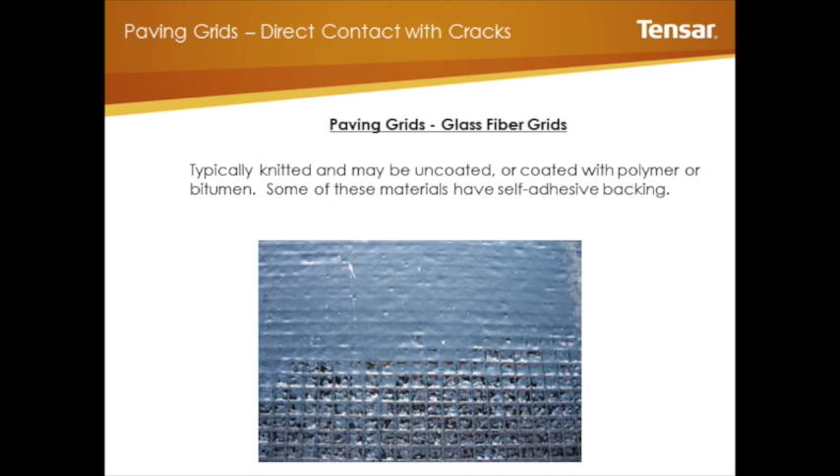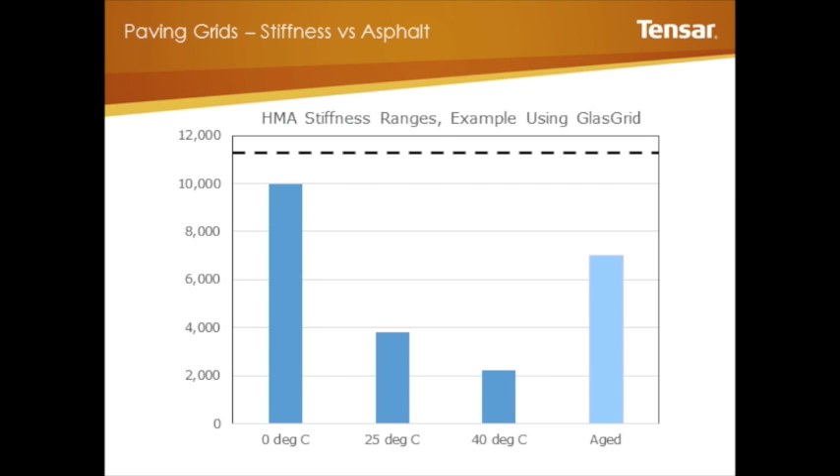And another case in point is when you're looking at testing of these materials - is it valuable to evaluate asphalt at room temperature when typically the risks are associated at low temperatures or when the material is brittle?

Now, to move on, we spoke about a product that has great bonding characteristics and integrates itself well, and we've seen we want a material that has a stiffness modulus advantage over the surrounding materials.

Paving fabrics, which we're not covering in this specific presentation, have been around for quite a while. They basically started the interlayer trend, and some of their benefits is that they also offer a moisture barrier. So typically with your paving grid, you do reduce the incidence of moisture movement, but you do not prevent it.

And so there are other products out there. A paving mat is probably the newest interlayer product out there. It's about 10 years old. Probably over 10 million square meters of material have been installed to date, and it's really a fast-growing interlayer. Why is that? Because we have increased the use of RAP in our day-to-day design.

When you include a non-woven paving fabric in your structure, the incidence of fabric in your RAP mix prevents you from reusing it as is. So it typically has to be screened, and it's a very expensive exercise, and most contractors do not wish to do that. So it's important for you to keep in mind that when you are specifying paving fabric, you may have an issue with respect to the RAP not being able to be used in the future. There are some facilities in the United States that can screen the material, but very few - I think I can think of 2 at present. So that is a consideration.

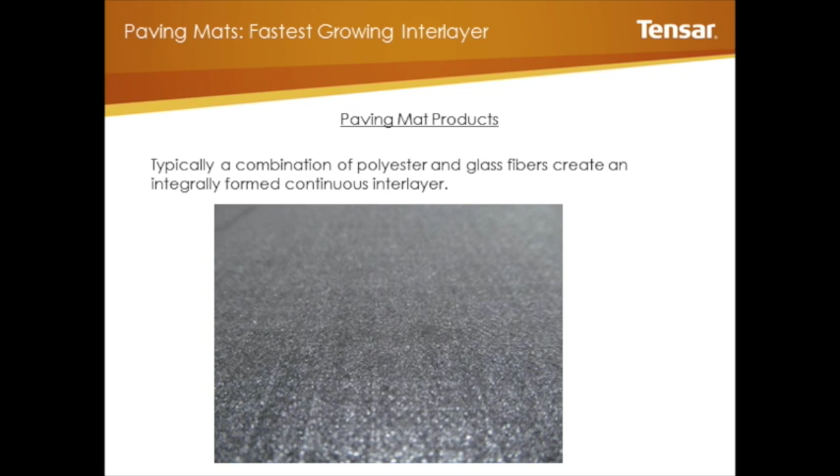So the paving mat really came about in that they were looking for a product that could give you the continuous moisture barrier benefits, but at the same time also perform more like a grid. So they came up with a material that can do both - looks like a fabric and performs like a grid. And it's recyclable. So that was a great transition that has occurred, and you now have a paving mat available for your use.

Another product that is also available is for conditions where you have distress in very localized areas. Remember, a lot of these materials require a tack coat for installation. So you have to come down with your distributor and spray tack on the road surface before you install your product, and that's quite a lengthy exercise. So it lends itself to larger application areas. Where you have just a localized crack, you would like to just come in and, what I like to term it, a Band-Aid - just install some material over an isolated crack here or there.

Then you have this peel and stick product. It basically has its own tack coat attached to it, so you can get the same benefits of your full width application, but you can install it in very localized areas. So it makes it a very cost-effective technique or use of interlayers.

And remember, I think this is a benefit of interlayers, which is quite foreign to most pavement engineers, in that most of our strategies we adopt, apart from patching of course, in most rehabilitation or maintenance projects, we look to cover large areas of the road surface because that's traditional. And doing it on your full sections, you'd prefer to do that.

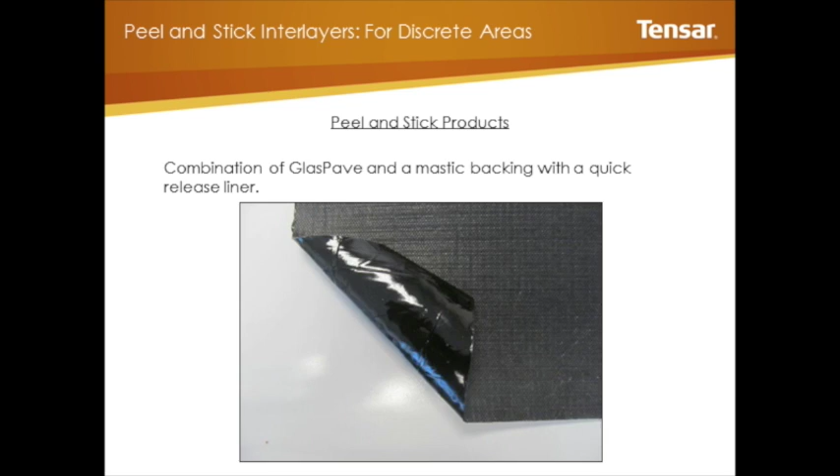The nice thing about an interlayer is you can stop and start the use of these materials without having to make it continuous. And we know that pavements deteriorate in very isolated areas, so you have severe areas and less severe, but you typically apply a standard approach, a standard overlay thickness. You can use an interlayer within that individual design section wherever you wish to without having to change the profile thickness, which generally creates problems. So in this particular case, it lends you that convenience.

A question that's often asked with respect to the use of interlayers on milled surfaces or plain surfaces is, can you put these products on a grind? Now, very simply speaking, yes, you can install anything, anywhere, and probably do it without much risk.

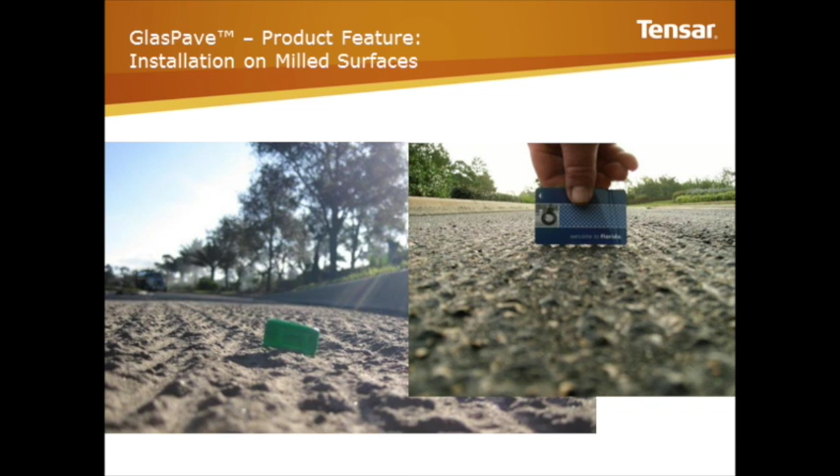But we know grinds of 3 millimeters exist, and some of them go up to 1 inch or 25 millimeters. So you can have this huge variation in grind profile texture. And the important thing is, yes, go ahead and mill to your heart's content and put the products down.

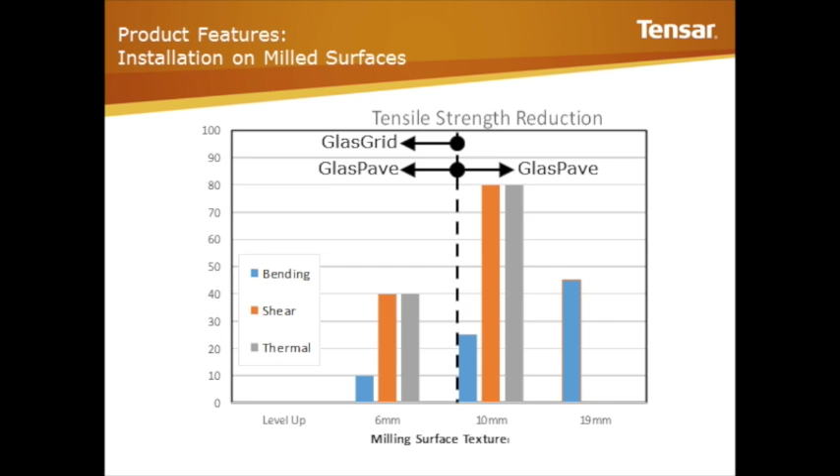But notice when you're going up to 19 millimeters, especially if you've got really severe distress types like thermal or shear cracking, the impact is more severe, so one has to take that into consideration. Yes, you can put it on any mill surface or any textured surface, but remember, you'd have to consider a stronger product than you would normally use if your textures are much greater. So for most of these products, up to 3/8 inch, up to 1/2 inch, you're probably pretty comfortable. Anything greater than that, stay away from your more severe distress types.

Textured surface is a consideration. Another question that's often asked - with all the Tensar products, our minimum thickness in all cases is 1.5 inches. I always recommend speaking with other manufacturers. For example, 2 inches is recommended on top of paving fabrics, and some other manufacturers may recommend that as well. Sometimes there are thickness constraints put on at intersections, for example, where there's a concern about the mix walking or shearing or flowing, however you want to reference it.

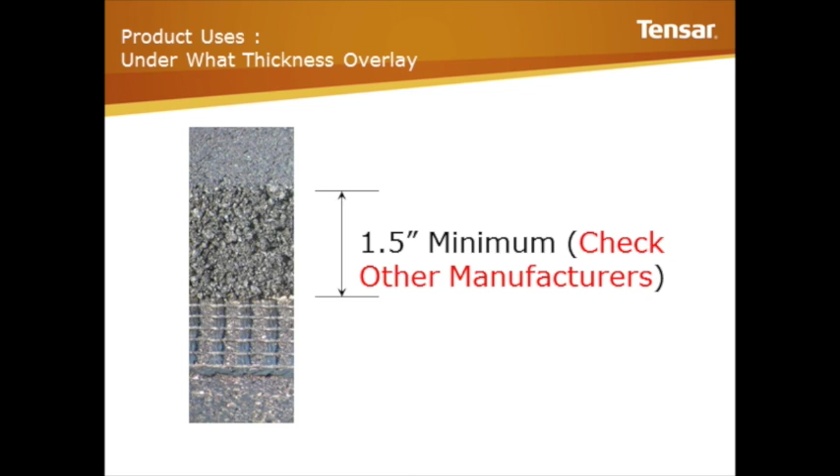My suggestion is before you start playing with thickness, let's look at the project holistically. I wouldn't suggest that just increasing the thickness is going to solve your issue if your mix is walking on top of the interlayer. Other than that, typically you can get away with these minimum thicknesses in all other cases.

Then you'll say to me, but hold on a moment, I heard the other day that you can use an interlayer underneath a chip seal. And I have 3 cases, and hopefully you can see this - I apologize for the quality of the slide. The top one refers to a single seal. Then you have a double seal underneath that, and a cape seal beneath that. I'm not really concerned about the specific aggregate sizes associated with each of these.

A double chip seal comprises 2 different size materials used in conjunction with one another. So it could be a 19 millimeter with a 6 millimeter chip on top. But irrespective, those 2 are more structurally stable. And it goes back to that walking concept - walking is typically the movement of particulate under traffic, so under braking, turning, acceleration. A single chip, unfortunately, the aggregate is more likely to walk because it's not confined, whereas in a double chip you offer that stability.

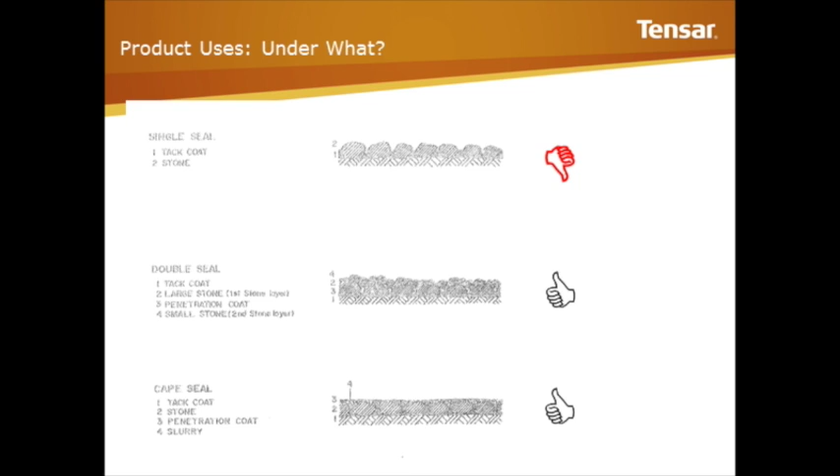And that's why I say you could consider the use of interlayers underneath a double seal or a cape seal. Paving fabrics have traditionally been used for that. We would recommend a paving mat as a good alternative to that. Ultimately it's a pretty good insurance, increasing your binder content as a reservoir for your application, and also to protect your seal from cracks coming through. So thicknesses do vary as it relates specifically to chip seal applications.

Now, where and why - I've got a range of application types here, so you can hopefully see that that's an airplane.

And for the tennis players in you, you can probably relate to that one. You see some ports, parking areas, residential, anywhere where you typically use asphalt as a surfacing is where you could consider addressing reflective cracking. And that's the trigger.

In some cases, there is the use of reinforcement. If used in a specific location in the pavement structure, you can actually get some reinforcing benefits, but that needs to be designed, and you'll see some boundary conditions, and we'll discuss it later on.

I've also got a couple of pictures of some different distress types, and what we recognize is, and I had a discussion this morning, we typically lump all these things under reflective cracking, but the reality is there are multiple crack types, as you'll see shortly.

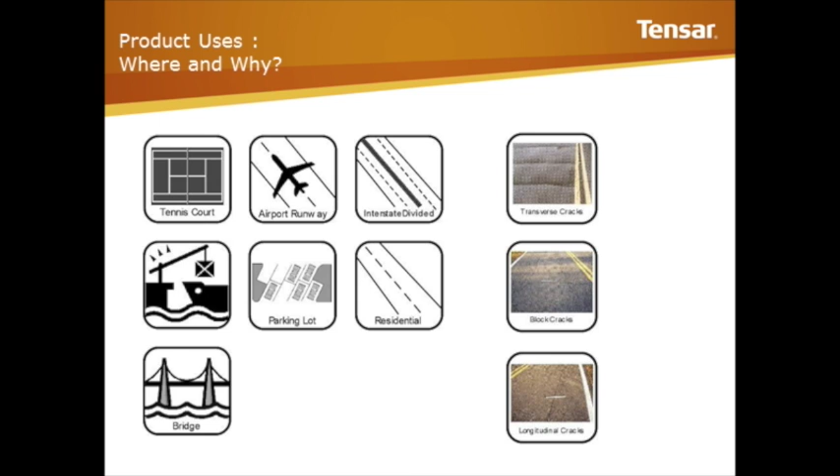But in terms of this, ultimately, whether you use overlays or double chip seals, cape seals, or where you're doing rehabilitation, you have to consider you're trying to protect the flexible pavement from moisture, or where you're trying to address reflective cracking.

This topic is also an important one for you, again, because of the RAP consideration, and important for you to get actual data from the manufacturers, because all of them do state their products are millable, which is totally correct - anything can be milled up. But again, you would like your product to look like this, so that it includes particulate that is not going to compromise the reconstitution of the material when included with new asphalt.

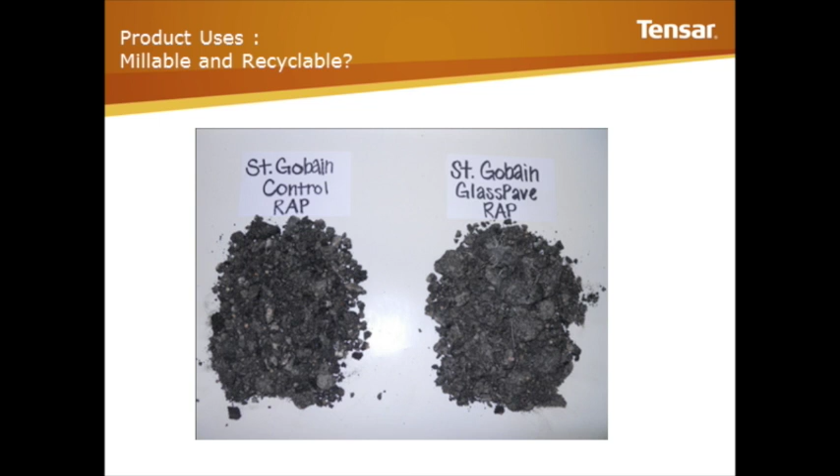So please make sure that you have reports provided to you to support this. For example, this is a study, or an excerpt from a study done at NCAT to confirm that the RAP, including milled particulate from an interlayer, did not compromise the performance.

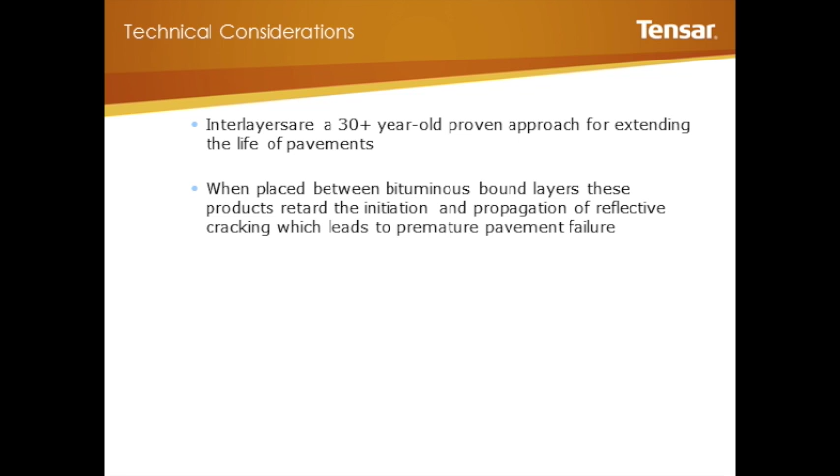They started with polypropylene grids, moved to polyester grids, then to glass. We're still playing with basalt type grids, looking at carbon fiber grids, and we've played with steel grids. We've tried different things to see how they could integrate themselves, and I'd say glass has proven to be probably the most strain compatible with asphalts across that wide range of conditions.

The first type of reflective cracking of interest, relating to the second poll question, is bending. This is typically where you have a crack sitting in a pavement, you stick an overlay on it, and nothing happens until a vehicle drives over it. Then your pavement structure flexes, and that deflection is associated with moving the crack, so strain develops at that point and wants to reflect up through your overlay.

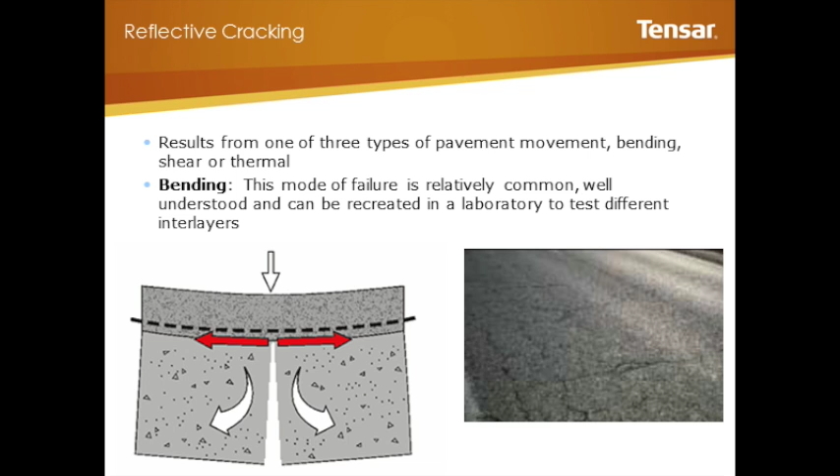This type of crack is a match made in heaven with interlayers. It's an easy one for the interlayer to address, and typically the boundary conditions are not as rigorous as they are for other distress types, so that's a good thing. So how do we evaluate that?

The 4-point beam test is a pretty good indicator of performance in this situation. It's a cyclically loaded test, so you're not just applying continuous pressure, you're loading it as you would in the field with traffic. Typically the test is done unnotched, but in this case, to evaluate reflective cracking, we notch it. Because the performance of these composite systems is so good and could take a couple of days to run, we increase the strain levels.

So you're typically doing strain levels that represent a thin residential street—those sort of load levels under a standard heavily weighted truck axle load. We're putting it under a very aggressive torture test type condition, and we're looking at both crack growth or composite stiffness loss, evaluating to what extent the interlayer can benefit that.

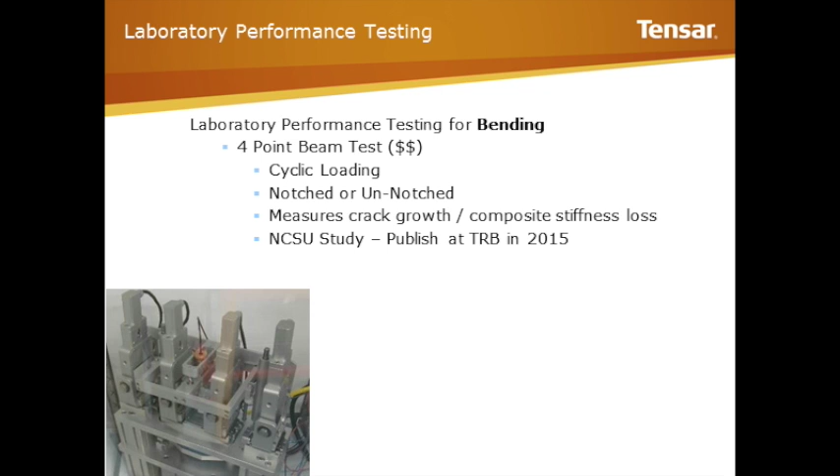When you look at the specimen after the test is completed, you'd be amazed to see there are no cracks. You go there and think, how is it possible we can see fracture during displacement, but not see fracture post the test? There are a couple of reasons: number one, the asphalt is relatively new, and number two, the test is done at room temperature.

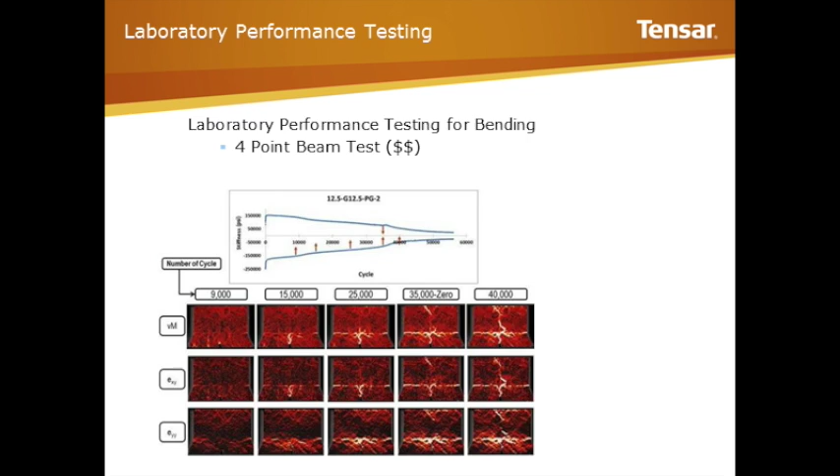And it brings about the question: do you use this non-visual criteria to determine performance, or do you wait for the visual distress to occur before you can actually start predicting how things are going to work? But it was definitely a challenge that we had to face, and was really interesting.

The next type of crack is a shear crack, and this one is best represented by composite pavements. This is where you have your joints moving vertically under traffic loads, where your dowel bars are typically located, and you get a relative movement of the slab. We talk about load transfer if the two slabs are moving down completely in sync with one another - then we talk about 100% load transfer because there's no relative movement. Typically when the pavement structure is new, you would hope that you experience that condition.

With time - I'm based down here in Louisiana at the moment, and they have experience with 20 to 50-year-old slabs - clearly you get loss of serviceability with respect to load transfer, and you can end up with structures sitting at 30 to 50% load transfer, which is typically a failed condition according to AASHTO, where I think everything up to 60% is probably in a relatively poor condition.

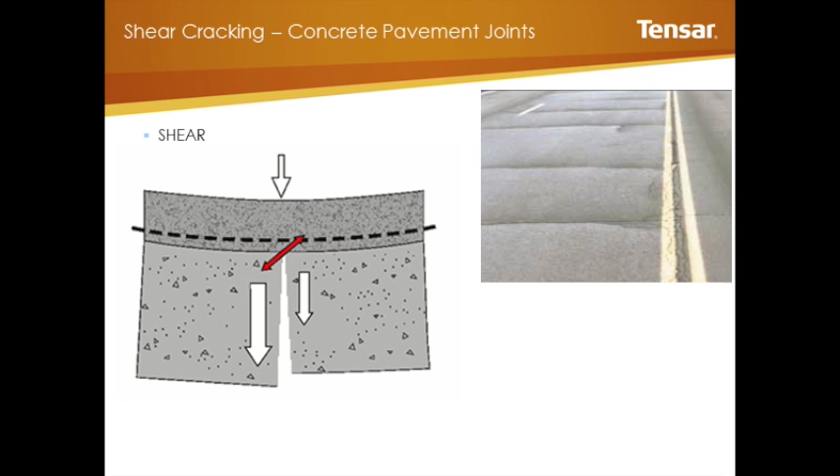What's important here, because this is such a severe distress type, is to understand the boundary conditions associated with it. Because load transfer is such a severe distress type to specify, not a lot of people go out and measure it - firstly because you have to use a falling weight deflectometer to do it, and there isn't a freely available technology to go out and do this.

But let's say you didn't have that information available - then we look at some other indicators. One thing we've learned with experience: I think our first ever project with Glasgrid was on an 80-foot long slab, and it wasn't a real project, we just provided some materials for trials. Clearly the movement at that slab was so significant that if you apply a very little load at one end of the slab, you get a high movement on the other.

So we've learned over time that typically slab lengths of 6 meters or less, under conventional conditions, would be an indicator for us that this is something we can handle - that the need to go and get data is less important, however it doesn't get ruled out.

The next criteria we look at is the number of mid-slab fractures you're experiencing. We typically say that if the number of slabs with mid-slab fractures relative to the total length is less than 30%, then we are still in a reasonable range of level of serviceability. But anything greater than that, we start recommending that some form of measurement takes place before you start spending money or investing in interlayer systems to assist you with this.

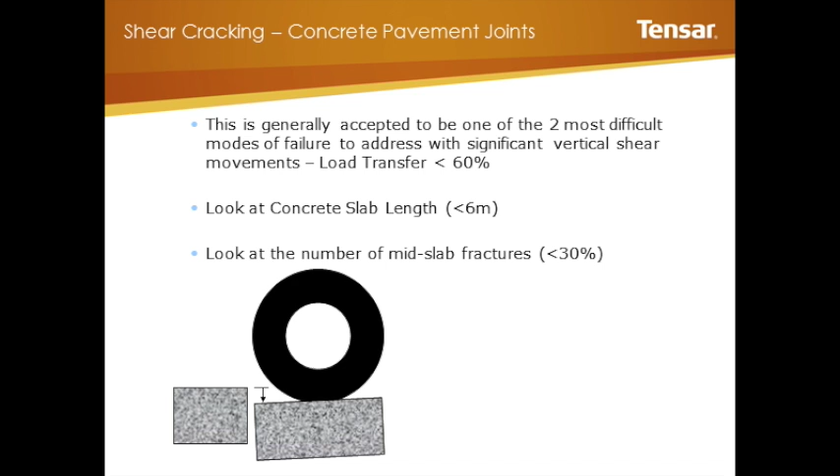This ties in very nicely with the criteria used by AASHTO, but we feel these are good boundary conditions or assessment techniques for you to adopt.

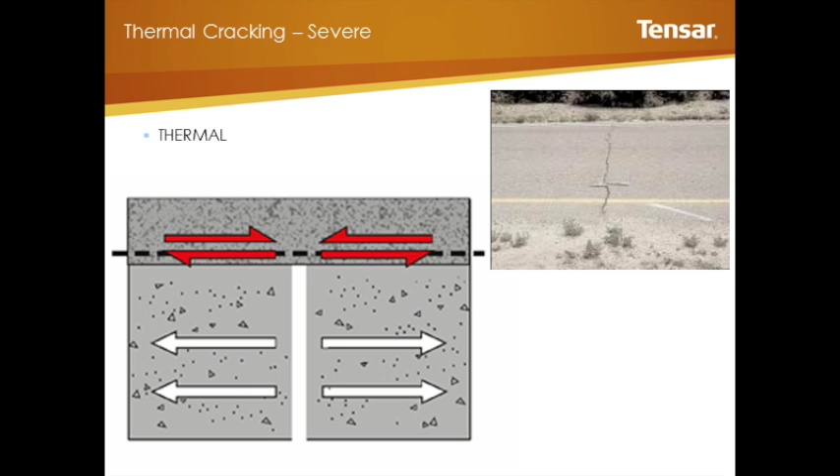The last severe one is thermal cracking. Why is thermal cracking so severe? Because with respect to our product, we put it in parallel to the relative movement that's taking place. So the structure of the product plays a key role in how you can transfer stress onto the reinforcing element. Paving grid, which was mentioned right in the beginning, is better suited to this type of application because your movement has to transfer the stress parallel to the reinforcing product. So an open structure product is very well suited to this type of application.

The levels of serviceability or boundary conditions are just as prevalent here. So we do look at what the climatic condition is where you're doing this, and we recommend that you speak to the manufacturer and confirm the level of suitability in the specific area that you've placed the product.

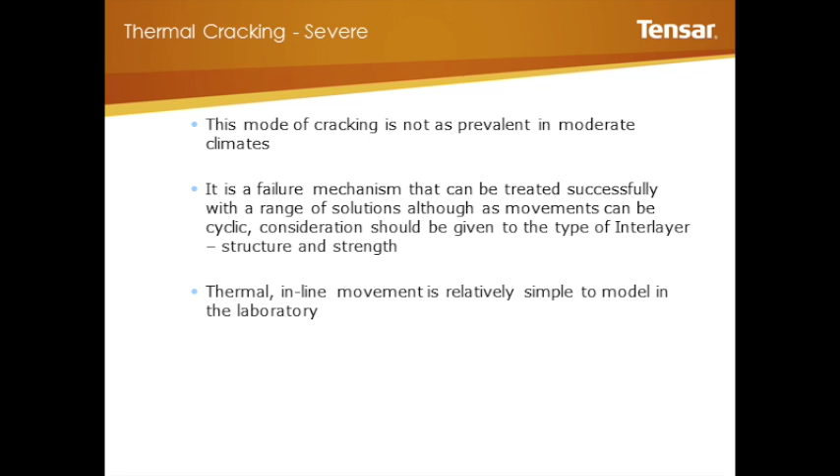We've applied it in very, very aggressive cold regions where the level of movement was way in excess of what our product can handle. So please understand that boundary condition does exist, and we do use empirical tools to help determine that. I'm not going to tell you there's one specific city where you have a problem, because your pavement geometry can also assist in determining how your thermal profile develops in that thermal condition. So there are a couple of things that need to be considered, but we do use empirical tools to assist us in the evaluation.

So with that being said, we've gone through those things. So how do we evaluate these? How do we know they work or don't work?

Fortunately, the Texas Transportation Institute developed a criteria using the TTI overlay tester. They use this to evaluate the mixes post-construction to determine how they perform from a fracture perspective. That's related more to fatigue.

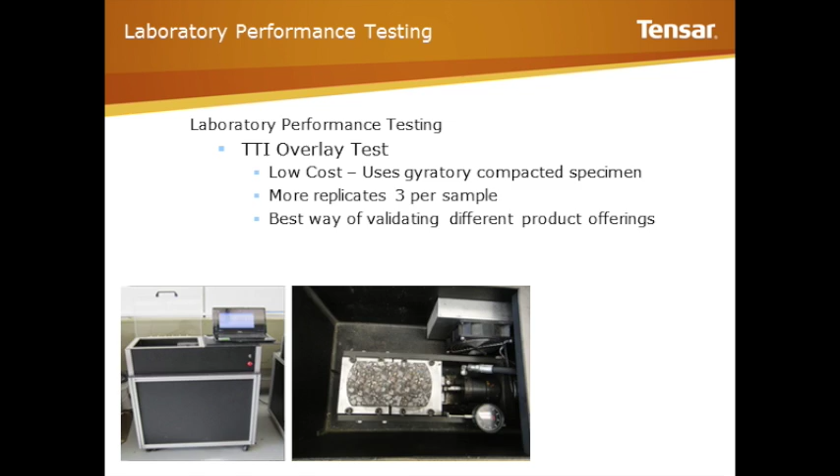So what we decided is we could use this technology, but we've changed the way the material is loaded. We use monotonic testing, and we also reduce the temperature at which the test is performed. Why do we do that? We do that so we can improve the repeatability in the test, because we want to improve its sensitivity. We also believe that at lower temperatures, we get a better understanding of the performance of the mix when it's more likely to fracture.

So what the test does is it applies a load, and if you look at the graph here, eventually it reaches a peak load. The asphalt at that point does not necessarily fracture. If you go back to those other test results I showed you earlier, you may not necessarily see a crack at that point, but it's a point at which you've exceeded the strain capacity of that material. Then it shoots off and you lose significant tensile serviceability.

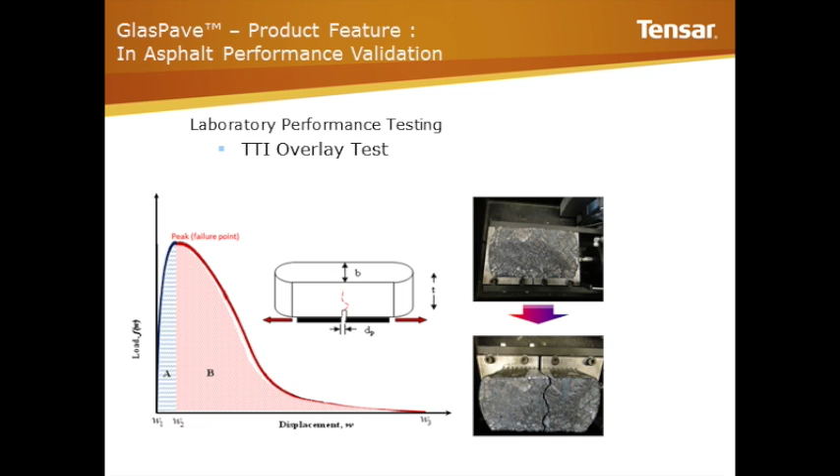The nice thing about these tests is we can manufacture the specimen, a composite specimen, using a gyratory compactor. We also like that we can produce a specimen with better repeatability. Where typically, if you're manufacturing samples for interlayer testing, they're normally large specimens, like a beam or slab, you can typically get plus or minus 4% air voids, which for reflective cracking is quite sad. So ultimately we really like the fact that we have better quality control. You can also take specimens from the field and test those, but ultimately we love the concept of this test.

Here's an example of the repeatability. These are three samples - you always do three replicates. It's a relatively inexpensive test, and here you can see outstanding repeatability.

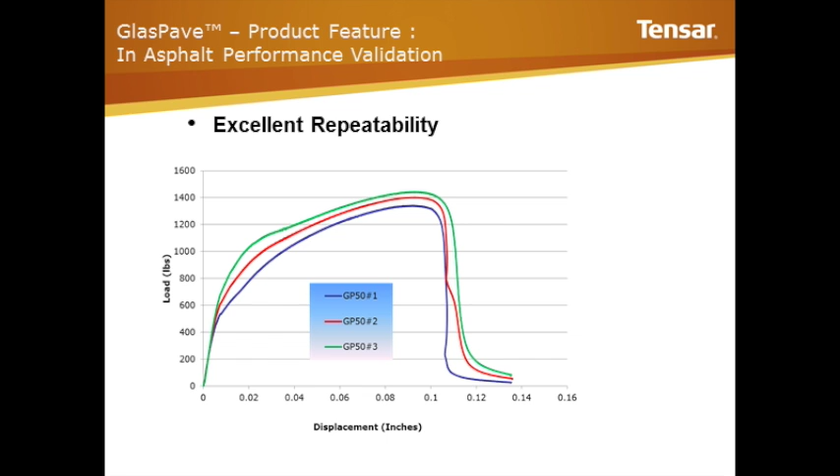Those of you who have studied or looked at interlayer testing in the past will see that this blows that research away. I can refer you to the Nottingham study done in 2000 in the UK - their results were pretty much all over the place, and they did beam testing. So this has given us a great sense of confidence going forward.

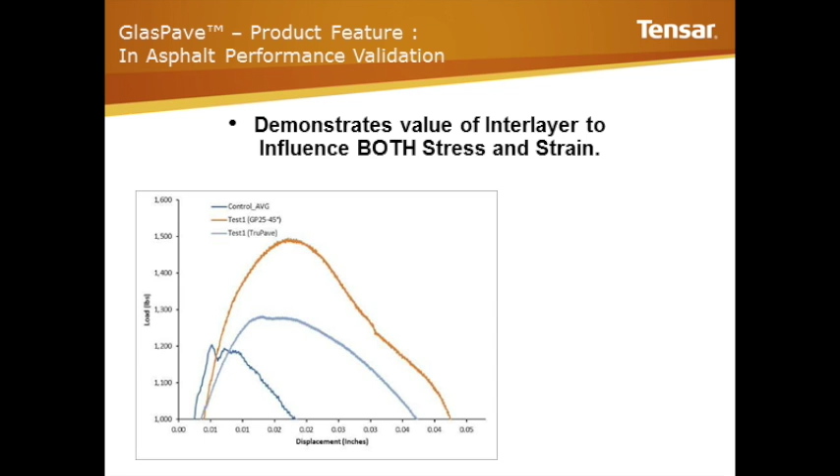That's very important - I think it allows you to consider these products in conditions that experience greater load, more cracking, or distress from block cracking, etc. Then ultimately, as you go to the stronger product, you can see even greater load capacity. So where you have a much higher percentage of truck traffic, you could consider using a stronger product. What does this mean?

This means that you can now start comparing other products, because of the excellent repeatability, you've got much greater sensitivity to evaluating different materials.

Some other interesting things have come out of it. We typically specify interlayers according to tensile strength, and yes, there is a correlation between tensile strength and performance, but only within a unique product group. So if I've got a paving grid, and I did a 50 versus 100 versus 200, there's definitely a correlational trend within that product range. But if I change the structure of the product, then 100 kilonewton is not equivalent to another 100 kilonewton, because the structure is different.

Now, looking at these results - and I apologize, there's so many - let's take GlasPave, that paving mat product I introduced at the beginning. That's a 50 kilonewton product. It's got a reflective crack index, which represents the ability to provide higher load and higher strain capacity. That index is ranked relative to the control. Remember, all the same mix was used for all these products, so the control is a factor of 1.

What's interesting is next to the paving mat we have 2 composite grids - that's a glass grid attached to a fabric. Remember I said with the fabric you lose efficiency. Well, look at that - you lose a third of the performance simply by including a fabric with the grid. So those composite grid specimens next to the GlasPave perform a third less. Then if you take another product - we won't mention the specific name, but it's supplied by Huesker, a polyester interlayer product. It comes with a different polymer, but it's also assigned a 50 kilonewton strength. It performs two-thirds less relative to the GlasPave 50.

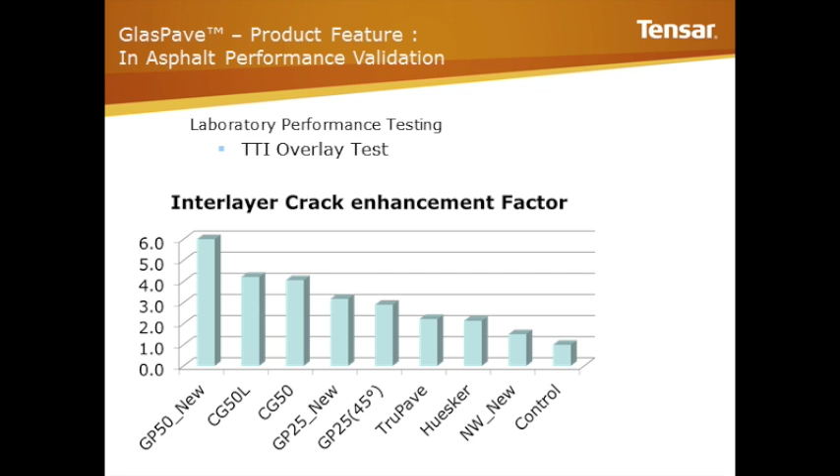So structure is very important with respect to this. What I'd like to see, and what we're working towards, is a specification that calls for a reflective crack index. Because then your industry can supply products irrespective of structure, according to performance, so that it links better to performance than simply just product indexes. I think that hopefully illustrates that pretty nicely.

All right, good. My voice is holding out, so that's a good thing.

With respect to crack distress identification, because we look at this stuff all day long, we'd like you to go out to the site and when you look at your project, identify what type of distresses are present. We spoke about shear earlier, and things like drainage failures. It's good to understand the mechanisms associated with these applications because they can impact the overall performance of the structure, not necessarily the interlayer, but we need to take that into consideration.

For example, this little triangle represents a bit of lateral shear at an intersection. We have to know if your mixes are walking around, because if they are, you don't need to reinforce them - you have other problems. One needs to sort out the stability of the asphalt first prior to addressing reflective cracking, because you don't need reflective cracking when the mixes are walking around.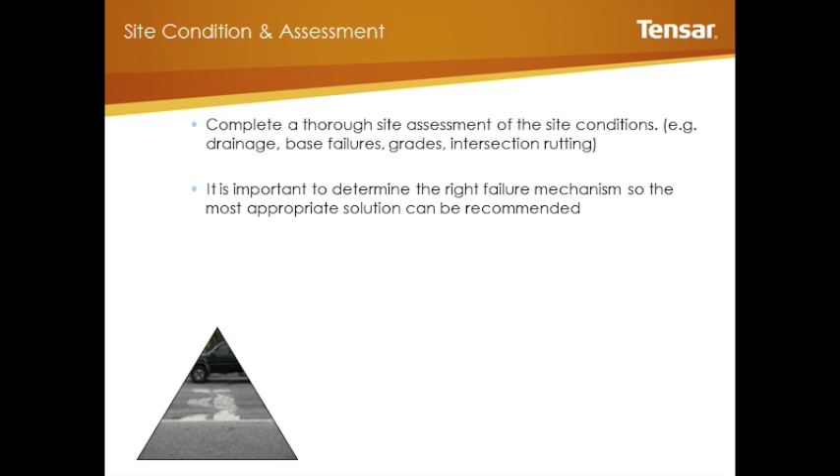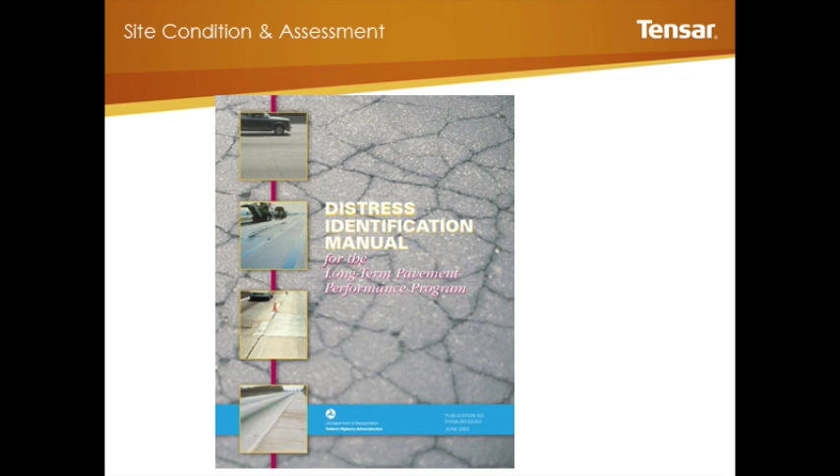But it's important to keep this in mind, which is why we typically ask for a profile of the distress types being addressed in your specific area. We use the Federal Highways Distress Identification Manual, or whatever local manual is used by an agency. We work worldwide, and it's amazing - apart from the fact I've never understood the Russian language, the distress types are pretty much similar to those we characterize here in the United States.

What is important to recognize with respect to characterizing cracks is that we talk about degree and extent of cracks in pavement management systems. You would think the degree of the crack would give an indication of severity. Well, the reality is it doesn't - it doesn't relate to reflective cracking. Just remember that a high degree severity crack with respect to a pavement management system does not mean it's going to be a high severity reflective crack in a pavement application.

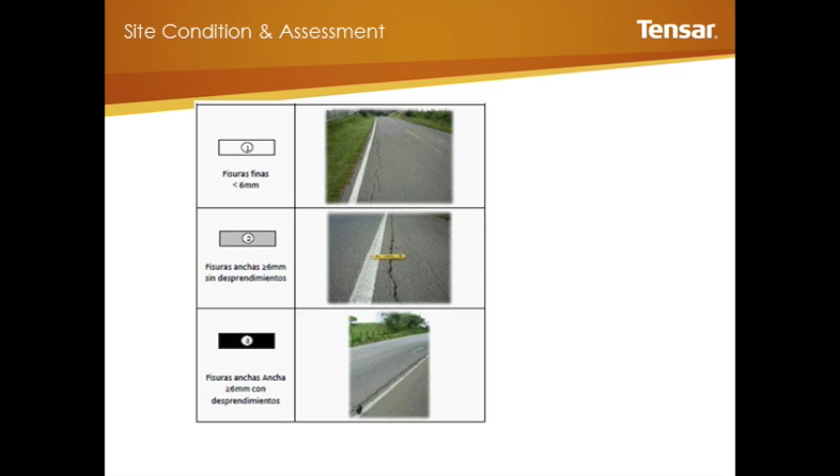In fact, a low severity reflective crack from a pavement management standpoint, under heavy loading, can actually be a very high intensity reflective crack. So that's not to confuse you - it's just to make sure you don't use the pavement management system criteria to determine severity of reflective cracking.

All right, so let's look at interlayer selection and design aspects. And I think at this point, I'm going to ask Nicole to roll out the next survey, please, Nicole.

We'll have some responses soon, but the important thing is you'll see that most manufacturers will give you recommendations on where their products can be used. The one thing I suggest is remember boundary conditions. We engineers work with factors of safety and everything, even fatigue models, and transfer functions used in mechanistic empirical design have boundary conditions. Understand that reflective cracking has the same type of phenomenon and doesn't deviate from engineering principles in any way. So we encourage you to request those boundary conditions with any application, material, or information from your manufacturer or supplier.

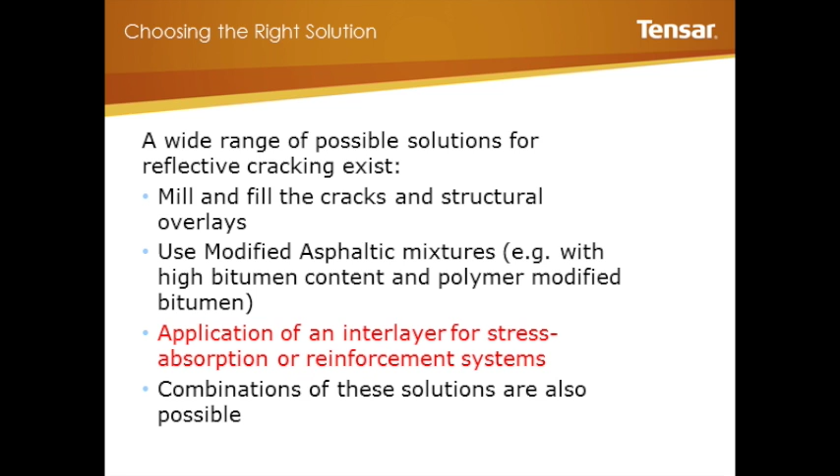So I spoke about boundary conditions, and you could have said, why didn't we just go straight to where and why to use interlayers? Because I'd have to explain bending and thermal and shear and so on. But the beautiful thing is we have a guideline here for you, and you're not intended to read all of it.

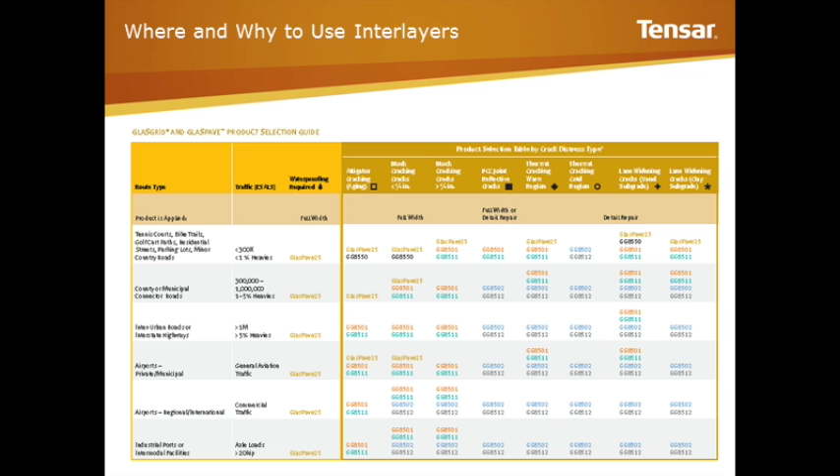Companies like Tensar and Mirafi will have similar guidelines for their products. Huesker, another very good company, would even adopt guidelines for the use of their materials. But once you've selected your product, it's best to contact the company, and some, like Tensar, would offer you the opportunity to use design, and we encourage that. Why? So we can do a calculation and make sure it's a cost-effective application for you.

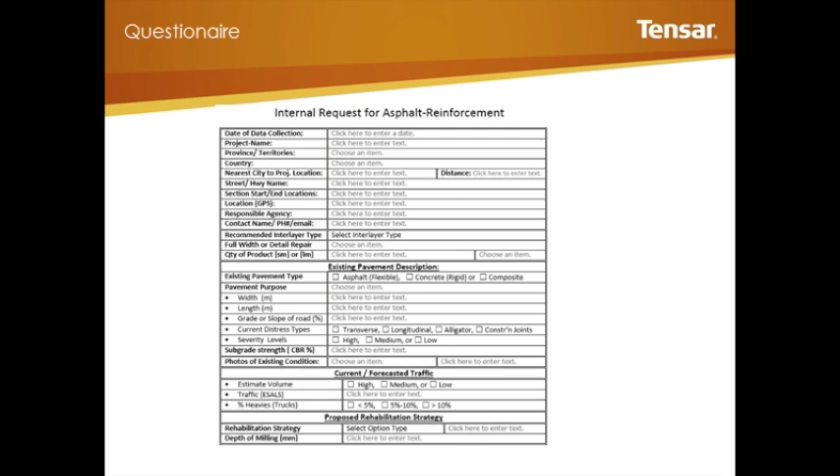We compare the analysis to what it would require using conventional asphalt, and we use public domain software to do the analysis, so we can supply you with the analysis tools and the research done to analyze that, which you can keep for yourself. You can put it in your drawer, and every time the salesperson comes in, you can challenge them on the performance relative to what was predicted. This makes sure you're using the products cost effectively.

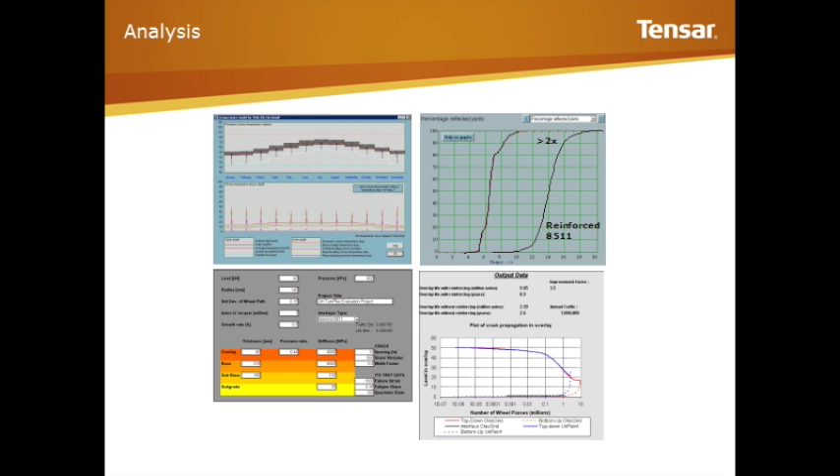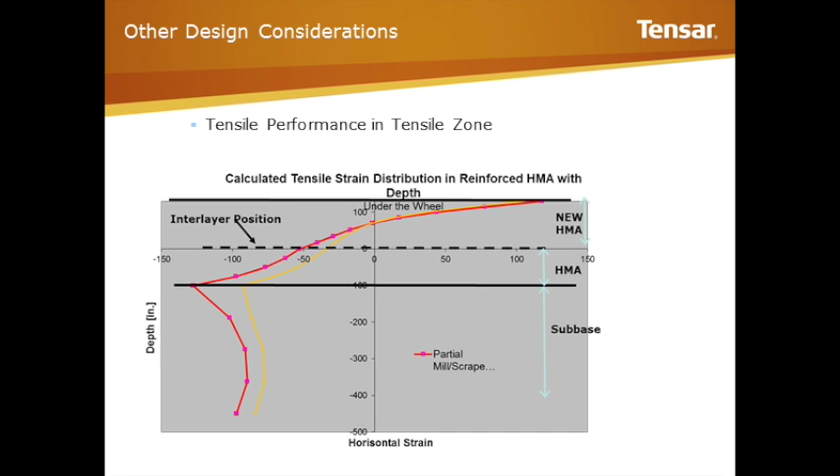Now, the product does not have to perform in tension when it's performing a reflective crack function. However, if you wanted to also provide a reinforcing function, then it has to be in a zone in tension. The other consideration for including the material deeper down is to ensure that if you come and mill over it, you don't remove your reinforcing component in the pavement structure. So those are two fundamental concepts.

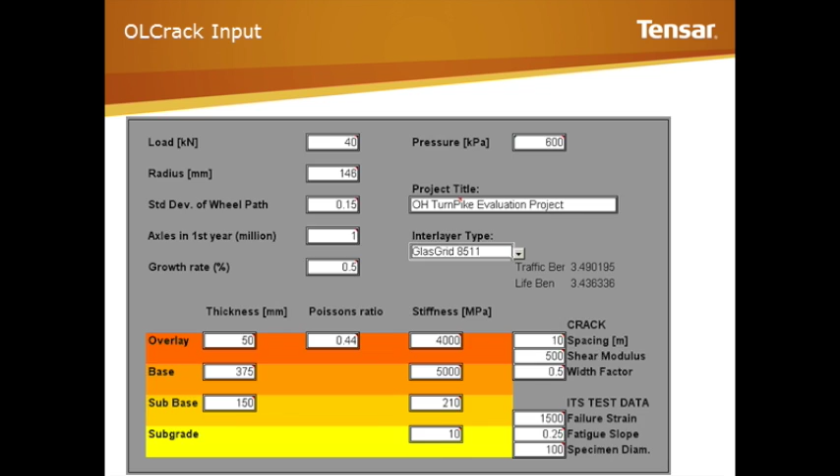Then with OLCrack, the input is basically just the geometry of your pavement structure and the loading you're using. We use this for ports as well as residential streets, so it's a pretty simplified approach. We define the crack type and the interlayer type, and we can evaluate any interlayer product on the market because the tool was developed including a wide range of interlayer products.

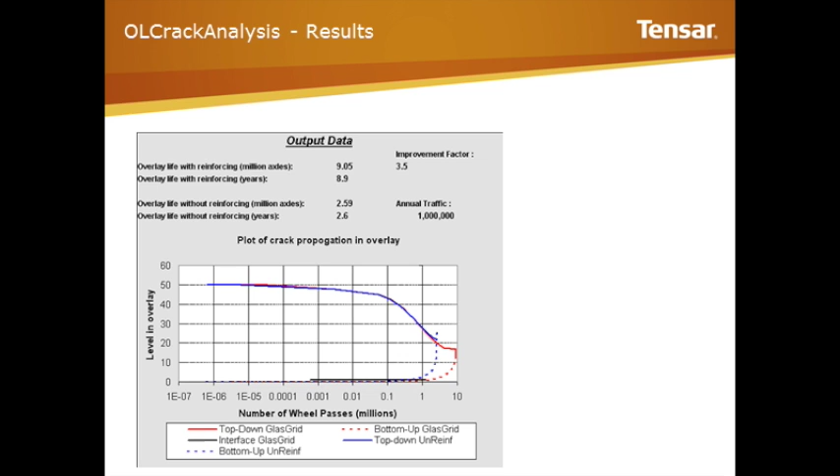The output is very straightforward. We get a reinforced result versus unreinforced, and again we can evaluate thicker versus thinner overlays. We ultimately provide you a report like this, done free of charge, giving a basic indication of what criteria is necessary and what installation considerations ensure you achieve good performance. So all of that is done for you.

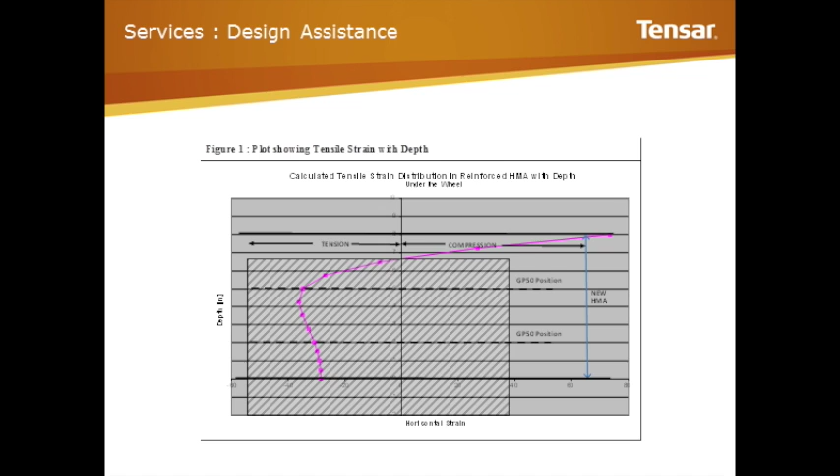We include the photographs that you've sent us. We evaluate them and say, nice crack, or that crack type doesn't look quite like the distress type we've evaluated, so we need some additional information. But we do look at that and provide that to you. In some cases, depending on what you want the product to do, we will evaluate the stress-strain relationship to see where the product is in tension or compression.

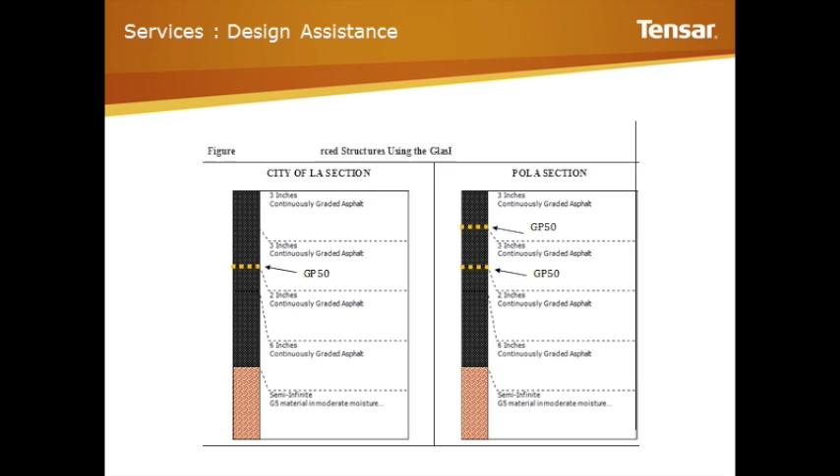We will demonstrate or show you where the product is within the section. We typically want to make sure, and we will ask you what mix type you're using, to ensure that we don't compromise the way you design your asphalt layer thicknesses with respect to the asphalt mixes you use. Your fundamental rules on aggregate size relative to thickness must still apply, and we don't want to compromise that. So we address and evaluate that and present it in the report. These results are presented to you, good for your reference and for your files.

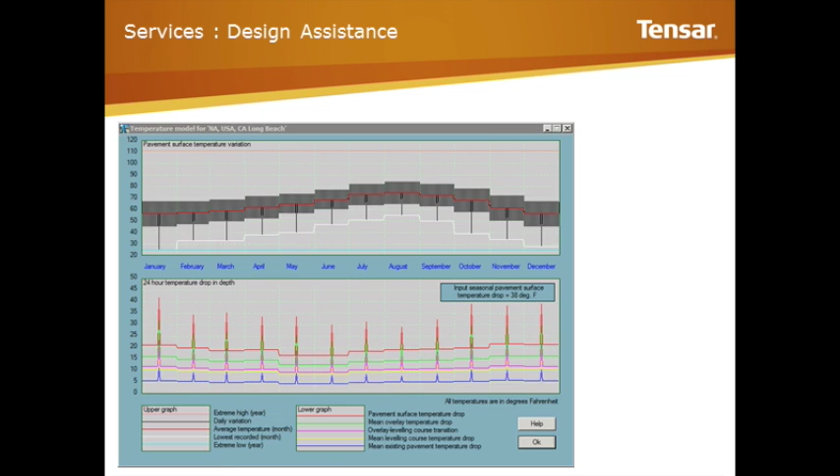The thermal criteria - again, you don't need to send us the temperatures. We can identify the nearest city or town to your project, collect data, and evaluate the performance of thermal activity in that specific location.

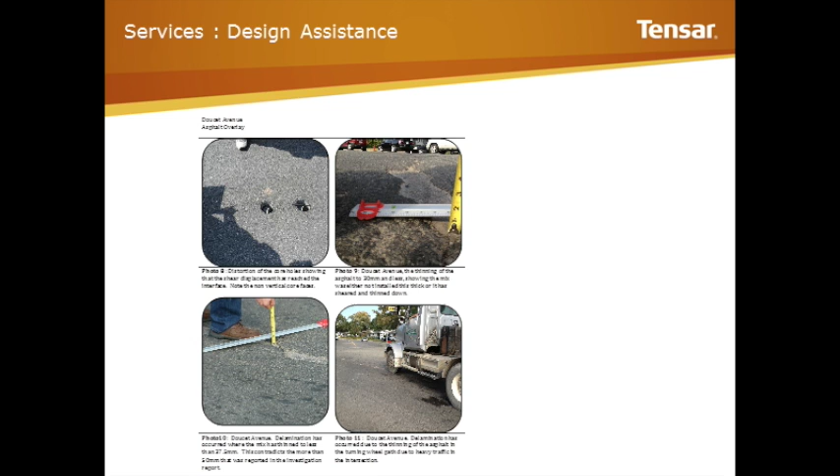So photographs are great, they're awesome tools. They cross language barriers, and I understand them - doesn't matter if it's in Russian or Greek or anything. So please feel free to send me as many photographs as you want, I love them. And then this report is again your best friend and a way to ensure you keep us honest.

Just to give you an indication, the OLCrack analysis allowed us to evaluate the impact of installation damage. Some products have different coating systems, and it's sensitive enough for us to account for the evaluation between different coating systems on interlayer products. So for me as an engineer, it definitely provides us the flexibility to evaluate the performance of these products.